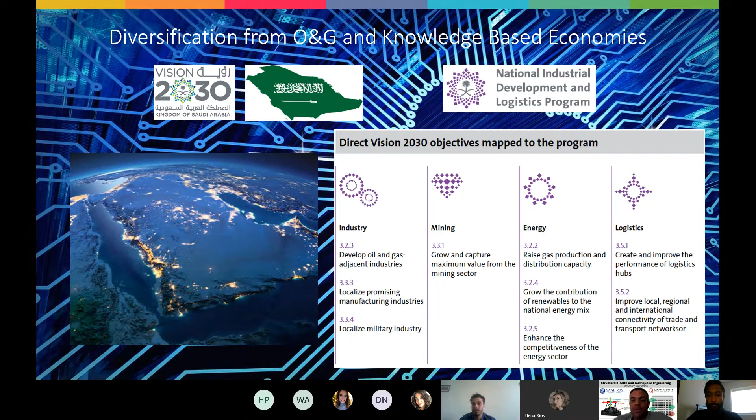This success, or the success of this initiative, doesn't and cannot occur without focusing on the biggest capital here, the human assets. The human assets support via continuous training program and technology transfer.

And finally, we at SABS RDS, we are looking forward to collaborate with you and to be part of this vision in our region's development.

Currently, Quanser has released 4 virtualized solutions: the Qube Servo 2, which is a DC servo motor; a twin rotor system called Quanser Aero; a mobile ground robot called the Qbot 2E; and a mobile manipulator called the Q-Arm. These solutions offer a complete introductory all the way to advanced offering for control systems, aerospace, robotics, and mobile robotics specifically.

That doesn't mean that we are stopping here. Quanser envisions a future where every individual will have access to our physical hardware and virtual hardware to open up the accessibility that these solutions provide.

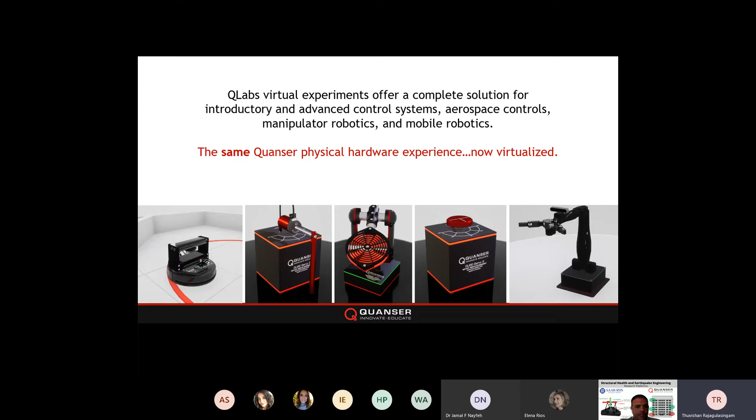So imagine every individual having a shake table or an active mass dampener on their actual PC, where they can explore the research efforts and teaching efforts in the coming future.

I'd like to quickly demonstrate what that looks like in a robotics context, but I want you to envision as if this was a fundamental vibrational structure that you know and love from Quanser. In this example, we have a pick and place mechanism that's being used to articulate the aspects of control, along with really pinpointing the accessibility and interdisciplinary approaches that you could take with an offering like this.

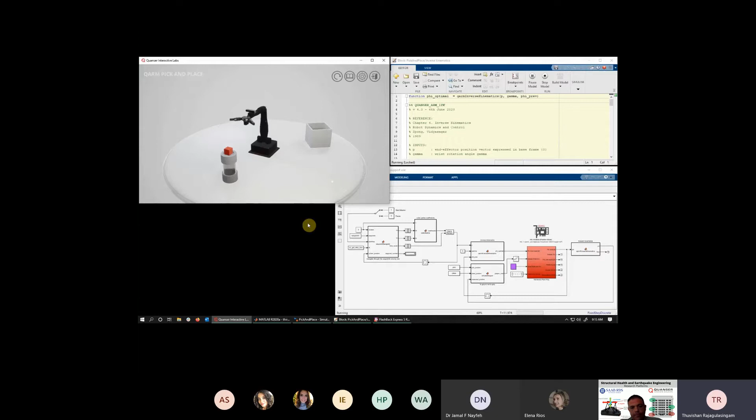Meaning you could have somebody from computer science leverage the onboard sensors, such as the RGBD sensing camera. You can have someone from robotics or mechatronics understanding concepts of actuation, dynamics, kinematics, needing to go through the math and science and the traditional academic rigors that would be required to be able to control an aspect like this.

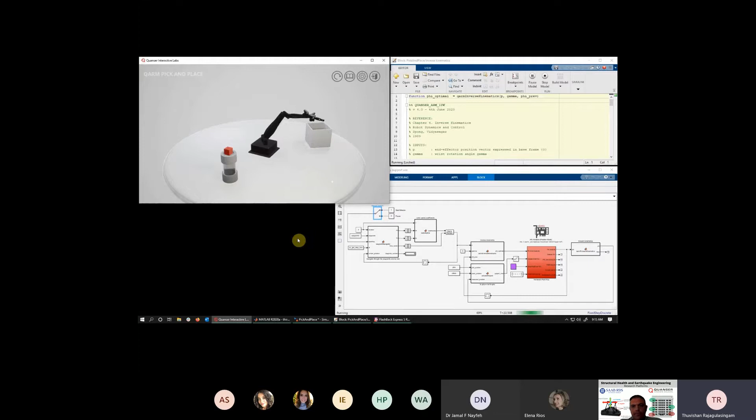But even further, you can take project-based learning approaches, or on the research front, an Industry 4.0 approach, where you're creating an assembly line that needs to read and react. So there are an abundance of possibilities, and right now Quanser's engineering team is working around the clock to have more of our virtual solutions enabled.

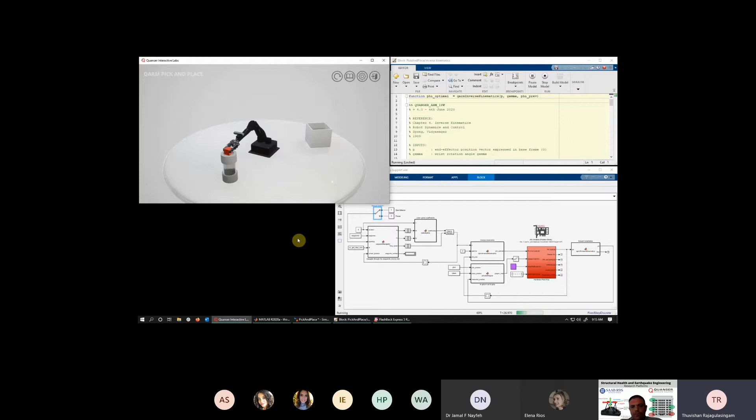We have 4 solutions that are coming down the pipeline: the rotary servo, the FlexLink, the ball and beam system, and our coupled tank solutions, for those of you who are well aware of Quanser's solutions. If you're not, feel free to take a look at our website for more insight.

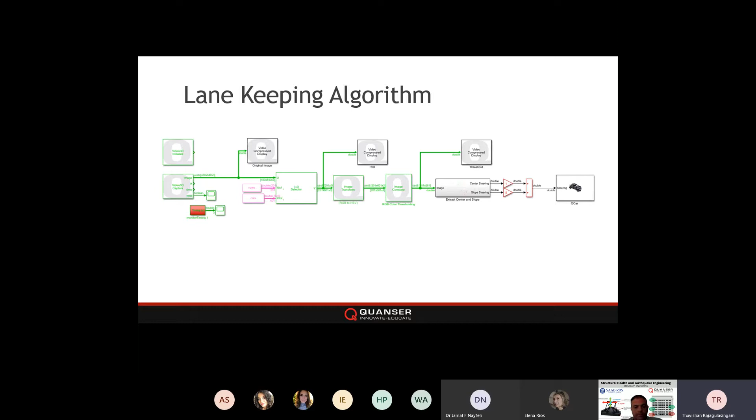With regards to how this could apply to a research application, because this question comes up a lot, we wanted to demonstrate using our own physical hardware along with the virtualized environment. Our director of engineering, in his basement during COVID, set up a custom layout with a 1/10 scale model of our Q-Car, a 1/10 scale model of a physical vehicle. He was able to develop a simple lane keeping algorithm, whose purpose is to have the car throttle at near full speed while maintaining its center position in the middle of the lane, tracking a yellow line.

You should see an example of that here, where the car is requiring itself to effectively control its position and velocity as it's making very aggressive turns in this loop format.

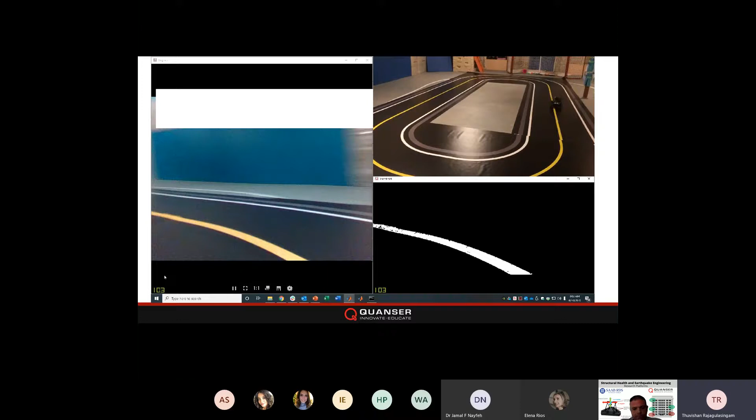Effectively, what this would require is actual procurement of the physical hardware. You need some lab instruction time, and you obviously need some technical ability to understand the theory and implement it on a physical controller for this actual device. But let's say you start running into problems or frustration when trialing your algorithms, or maybe you don't have space to set up a track at this scale.

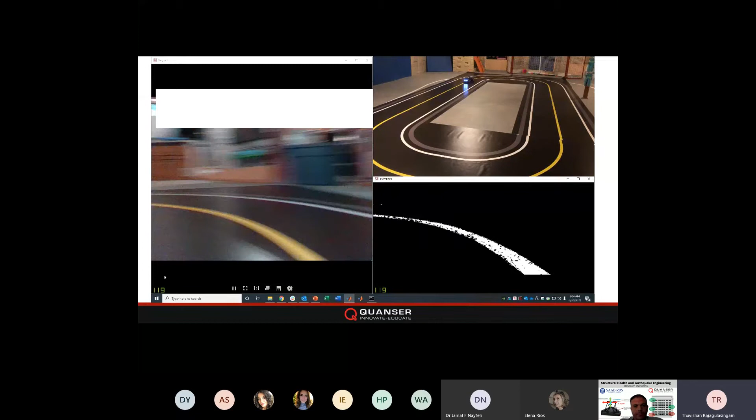What we have been able to do is provide a virtualized parallel experience where you can validate your algorithms in our virtual environment called Quanser Interactive Labs, which is a 12-month subscription for both teaching and research efforts.

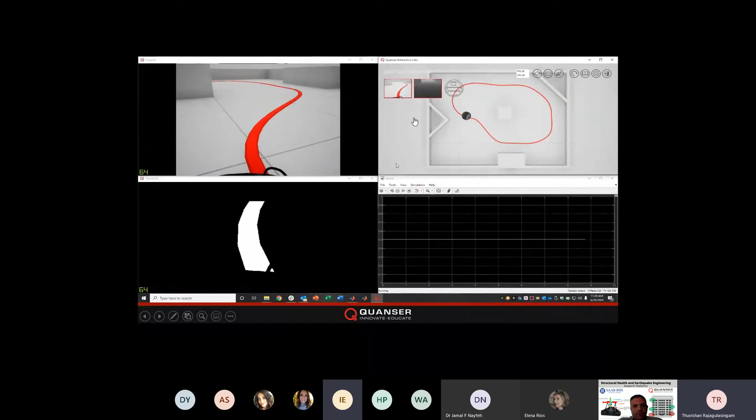Our director of engineering took this platform, Quanser Interactive Labs, and developed his lane keeping algorithm, fine-tuning it using the Qbot 2e. On the Qbot 2e, he's created his own custom layout, running the exact same controller with some fine adjustments to the actual steering algorithm. In essence, he was able to finely tune the controller utilizing MATLAB Simulink.

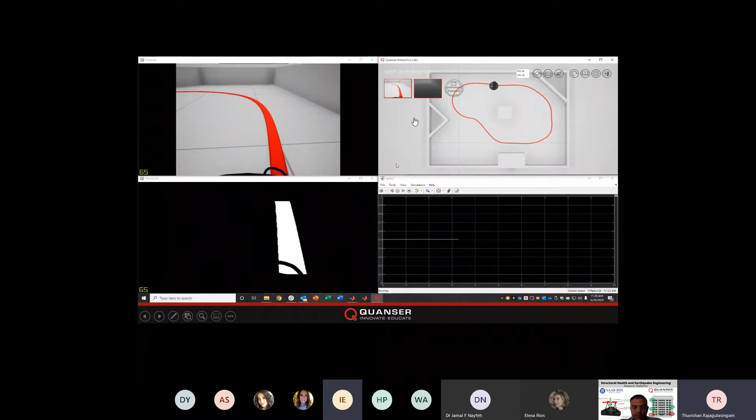Right now, at this present date, we don't have a direct tie to civil engineering or earthquake engineering, structural health monitoring, but please keep in touch with Quanser if you see an overlap of interest, or if you have specific projects you'd like to embark on, because we are in the collaborative stage right now. We'd love to hear your feedback as to what you would require and areas where you could leverage these solutions for your research or teaching efforts.

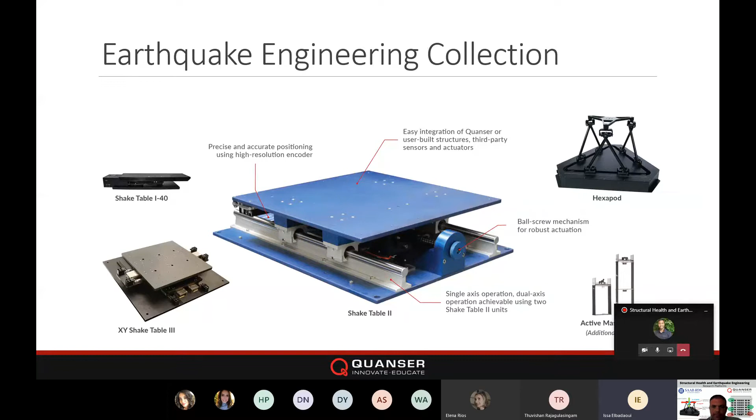This requires a different approach, such as having a designated building specifically for this sort of project, as well as having a technician or operator dedicated for this building. It does require a lot of preparation and time to test and run applications, and the setup requires regular maintenance, with expensive parts that take months to build and deliver to the professors in case there is some sort of misuse of the parts.

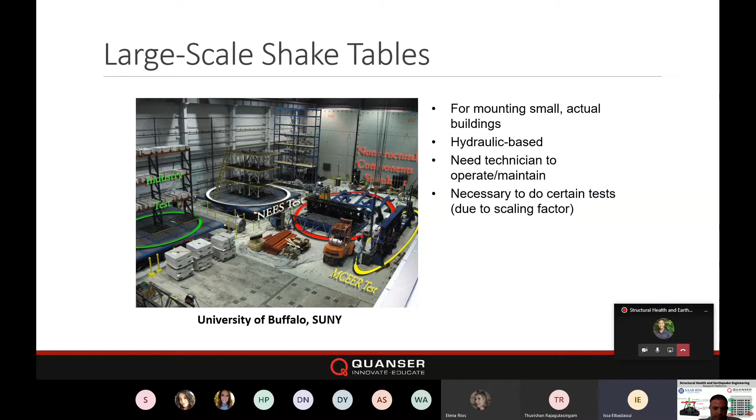So for this type of applications, as Quanser, we have developed different solutions scaled down for a regular lab that you can use at a university itself.

We have developed different types of scaled bench-size solutions for students that can be used in normal regular labs. These solutions are developed specifically for academic purposes as well as research applications. We have a variety of solutions that vary from 1 axis all the way to 3 and 6 axes, and require little to no maintenance from your end.

Some of our users have been using the shake tables for almost 13, 14 years and never actually got the chance to change any of the parts. We also took into consideration the research side of it, and we built some smart structures that go on top of the shakers to imitate earthquake vibration studies, and you have the ability of adding your own structures in case you're looking to adopt different sorts of applications.

I will start with our benchmark scaled shaker, which is the Shake Table I-40. This is a unidirectional shaker that is fed through a DC motor, as you can see from the left-hand side of the picture. It has an encoder connected to our DAQ to get the real-time data.

We also took into consideration the safety measures, so the system will come with 2 limit sensors, as you can see here from the pictures. Just in case the students are exposed to these sort of solutions, we want them to have a safe environment. And built-in accelerometers are part of the station that will get data for you to implement on your software.

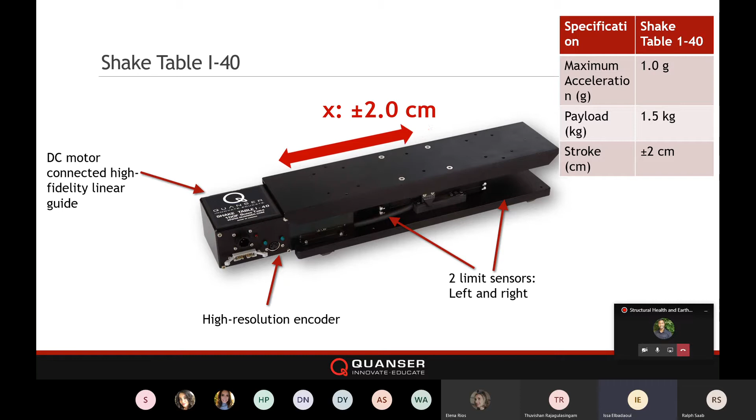In terms of specifications of this shake table, it has a maximum acceleration of 1G at a payload of 1.5, and a stroke, as you can see, of plus and minus 2 centimeters.

So in this case here, this is one of the most successful platforms in the market, the Shake Table II. Without going into many technical details of the hardware itself, the system also has a bigger platform for bigger applications in case you are trying to build bigger structures. It has an accelerometer, a DC motor, and of course it comes with safety sensors to limit the movement in case the students are exposed to some sort of the solutions.

Just to give you a little bit of background about this sort of solution. We were contacted, if I'm not mistaken, somewhere around 13 or 15 years ago by 23 universities from the US who wanted to adopt structure dynamic solutions. In collaboration with these universities, we were able to build the Shake Table II, as you can see here, and it has been adopted by different universities worldwide.

So this platform has been used mainly in education and research. Some of the specifications of the Shake Table: they have a maximum acceleration of 2.5G at a payload of 7.5 kg, sorry, 68 kilograms, and you have a stroke of plus or minus 7.5 centimeters. So it has a fair good stroke to start imitating earthquakes that you can adopt in it.

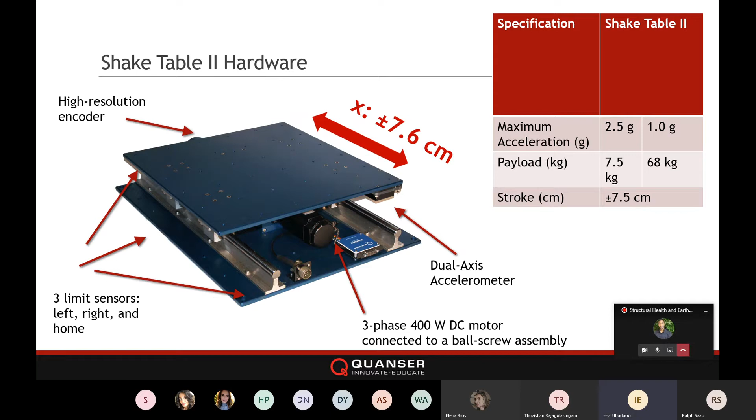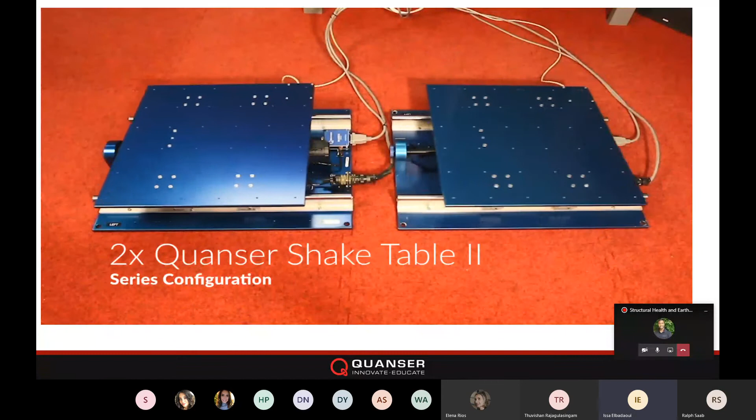I'm going to show a short video here of different sorts of movement and configurations to use the Shake Table 2. You have the ability to mount active mass dampers that we provide for vibration studies, or you can develop your own, depending on your own applications.

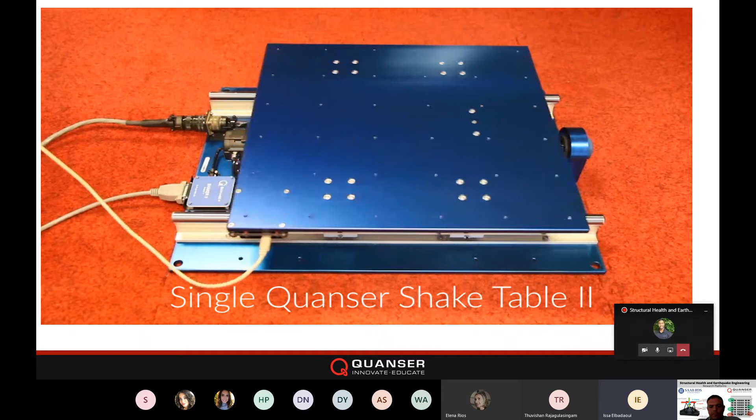The other option that we offer with dual axis is the Shake Table 3. This dual axis platform can adopt a higher payload up to 100 kg. This solution is very suitable for research applications as well as high-load teaching applications.

Some of the specifications of the hardware, as you can see: you have dual axis, you have a high-resolution encoder, four limit sensors, and a linear motor.

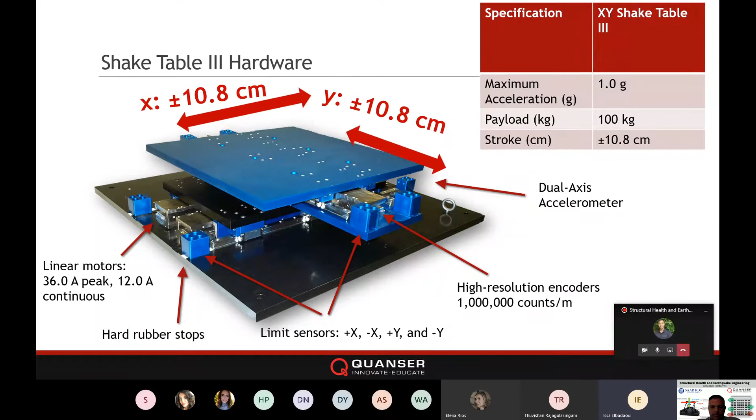Some of the specifications we can talk about is the maximum acceleration of 1G with a payload of 100 kg. We have tested it at 100 kg, but the system can adopt more payload. The stroke on each of the axes is about 10.8 centimeters.

Moving forward to a 6-axis platform that we have developed with a payload of up to 100 kg, and it can go higher. The Hexapod is a fully documented solution that Quanser has developed.

A backstory of this solution: we were contacted by a professor from New York University, Dr. Venkat, who expressed to us his concerns and what type of solution he was looking for.

We have worked hand in hand in collaboration with him to develop our Hexapod, which has been used in different sorts of applications, also in the defense sector here in Canada and in the US.

Some of the specifications I could highlight of the Hexapod itself: a maximum acceleration of 1G, payload at 15 kg, but you can up the payload to 100 kg. A stroke on the x-axis will be plus and minus 13 centimeters, y will be plus and minus 7.5, and also on the z-axis will be plus and minus 7.5.

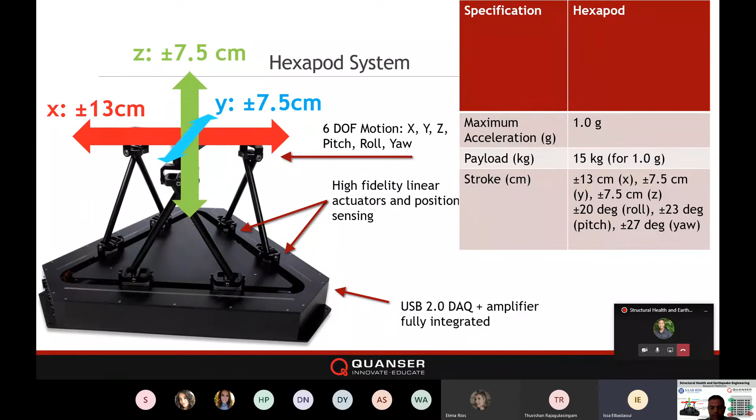I'm going to show a brief video after this that demonstrates what the Hexapod looks like, a brief demonstration, and it will also show some of the applications it has been used in.

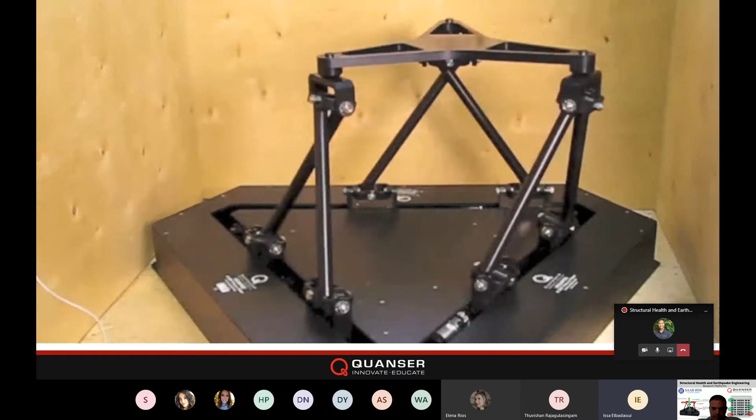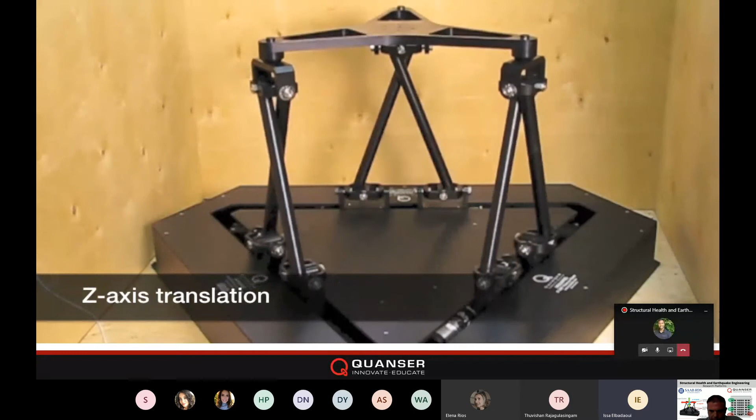Here we'll show some of the motions the Hexapod can do: the x-axis translation, then the y-axis translation, used for different types of applications or research depending on what you're looking to adopt, and the z-axis translation. As you can see, the system moves smoothly without any interruption, and it also has roll in the rotation, so it can move in X, Y, and Z.

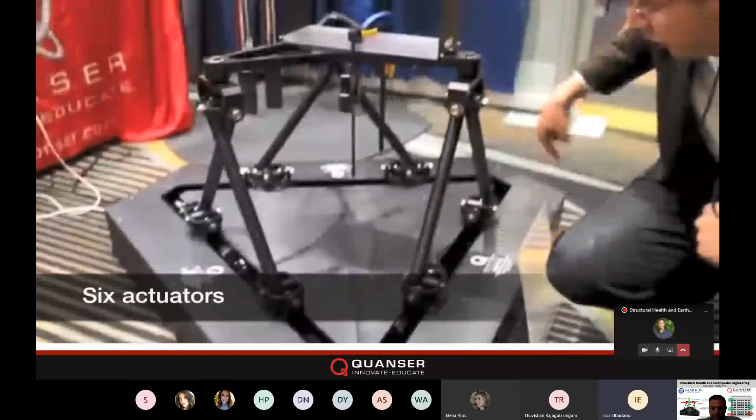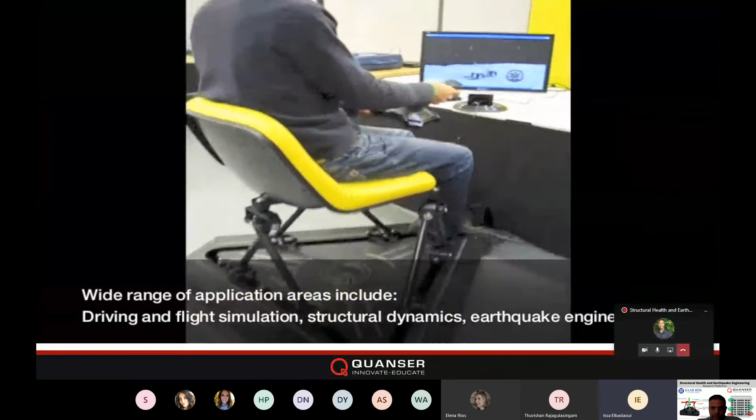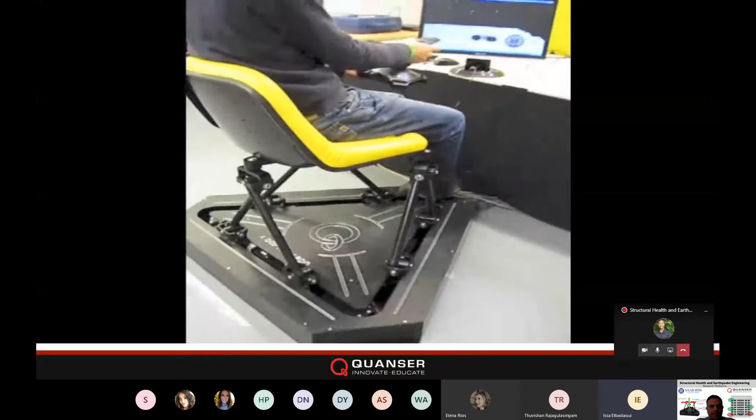Moving forward, this will show an overview of the connection of our platforms. It's very easy to set up, requires almost no maintenance, and is very robust. The system is very student-proof and can fit in a lab. Adopting these solutions, you can have 3, 4, 5, or 7 platforms in the lab depending on how many students you have, and you can also adopt them for research applications.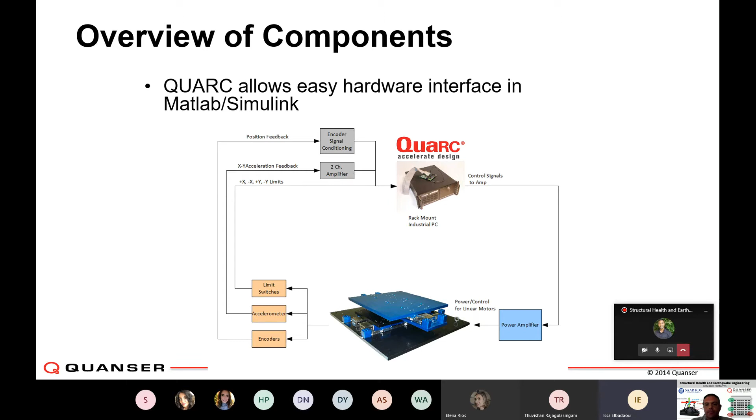Moving to the software side, we support LabVIEW, MATLAB Simulink with QUARC, our own software which allows real-time communication with the hardware, and we also give sample controllers for that.

On the left-hand side, we've developed our own software that runs basic tests such as sine wave sweep, and we provide 4 earthquake samples. You can also download earthquake data from a trusted website and upload it directly into the software to run. With these solutions, you can save the data for further analysis, share it with other researchers, or share it with students for further analysis at home for their assignments and labs.

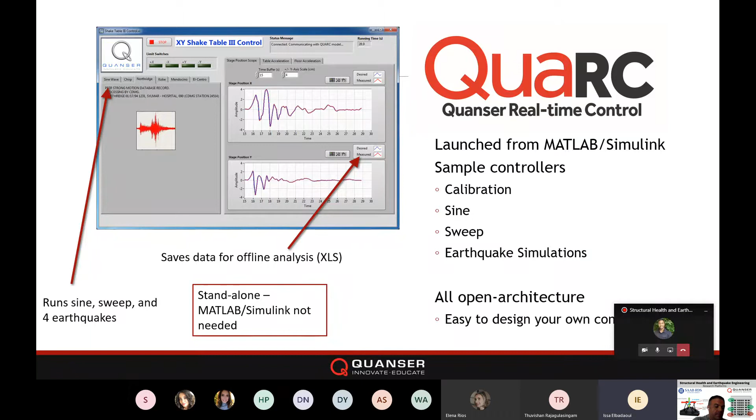All of our solutions are open architecture and come with courseware tailored for your teaching applications. The courseware has two versions: the student version, which does not have the answers or solutions, and the professor or instructor version, which has the examples and solutions to the labs and experiments we offer.

As I mentioned, you can add our mass damper to the platform, either with one floor with an active mass damper, or with two floors, one with an active mass damper and the first floor with a passive mass damper. As you can see here, these are building demonstrations, and you have the option to add your own structure if you'd like, instead of adopting our own active mass damper. I'm going to go into some details on that.

You can mount it on our shake table, connect it to our DAC, and start getting data out of it. As you can see, our systems are fairly adaptive to different applications, depending on what you want to do in your teaching or research applications.

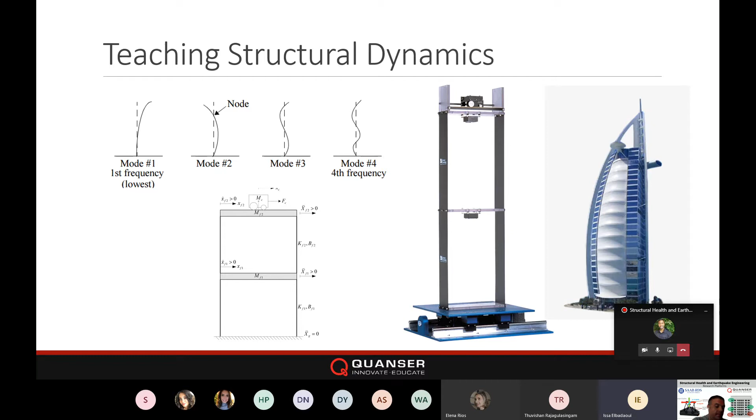Here's an example of some of the universities using our tables to motivate first-year students and bring that theory to applications.

So what we are trying to do is bridge that gap between application and theory for students who are overloaded with abstract math and physics, and give them the ability to implement their ideas and have a visual implementation of how the structure would look and how an earthquake will affect it. Moving forward, I'm going to show you an example of a class utilizing our shake table with custom structures that showcase vibration for students.

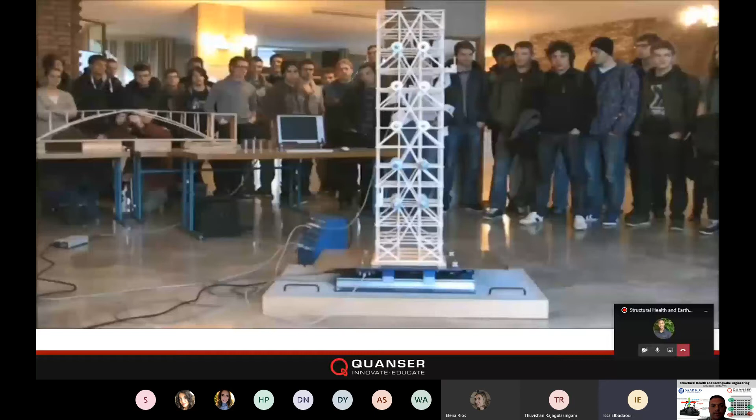I'll leave you with the video, and it will show two examples using an earthquake. The first is not damaging to the structure itself. The second one will show a damaging earthquake implemented using the shake table.

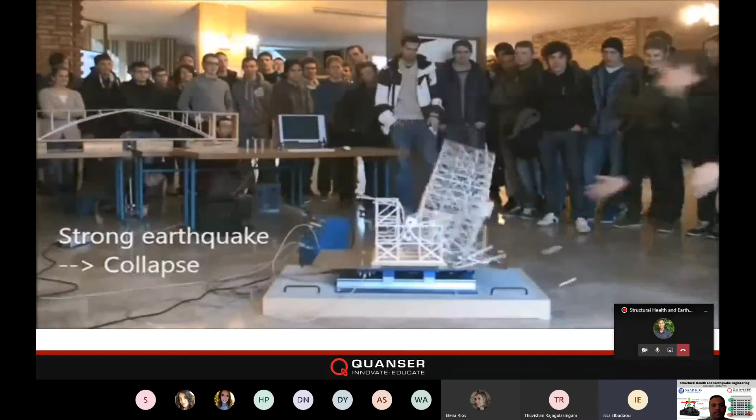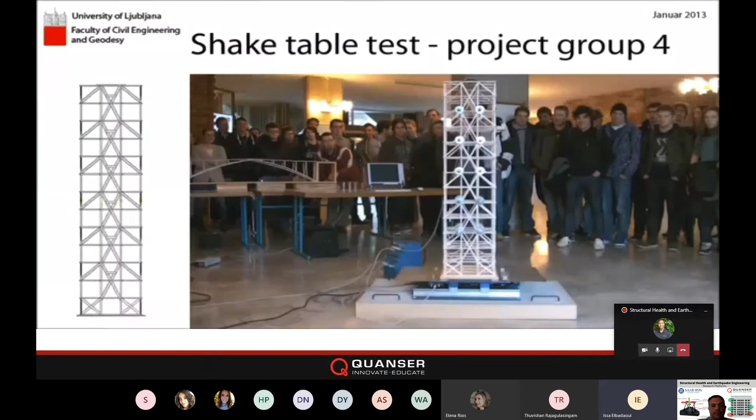Now moving to the collapse side, which is implementing an earthquake that is damaging to the structure. This gives students the ability to analyze and understand how that vibration will affect the system itself.

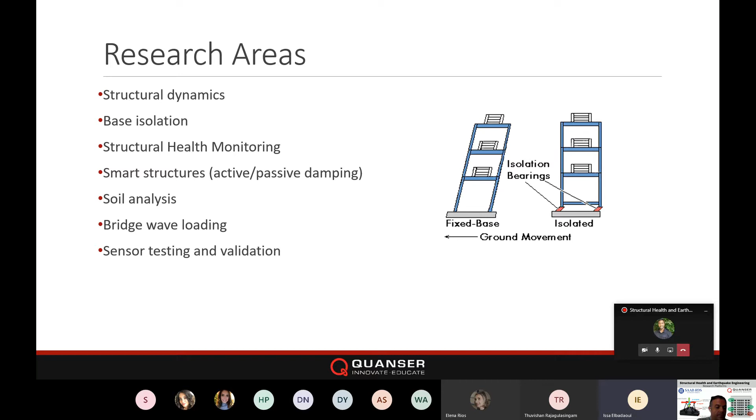Now moving forward to the research area, these are sample research areas where our platforms are ideal solutions. We have a huge list of research papers published using our shake tables, and you can use them to study structural dynamics, base isolation, smart structures, soil analysis, bridge wave loading, and other research areas already targeted with different partners from all over the world using our shake tables.

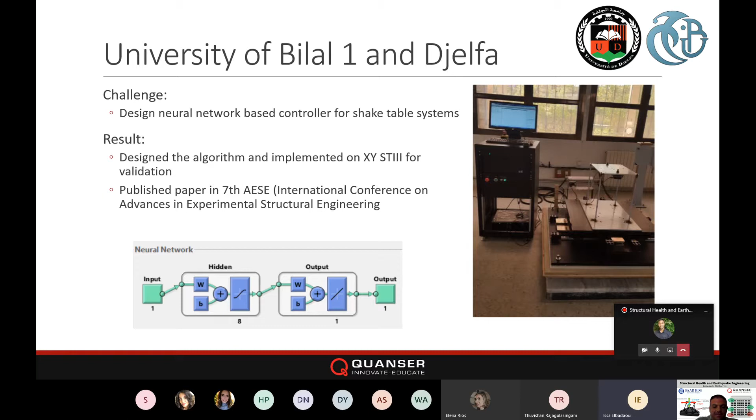So definitely using some of our platforms, you have the ability to target different research applications that are not just implemented in regular structures.

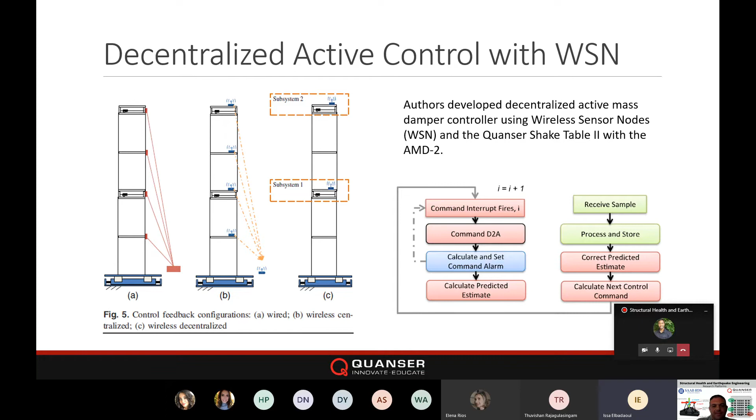Moving after that, this video will show an example configuration of a university using two Shake Table IIIs with a mounted structure itself. For their application, they used LabVIEW as the software. They can use various structures with either frictional or non-frictional surfaces.

This replicates an earthquake coming from the earth. As you can see, when it comes to bridges, one of the pillars will receive the wave before the other one, or both pillars will receive the wave at the same time. So you have the ability to do that sort of application.

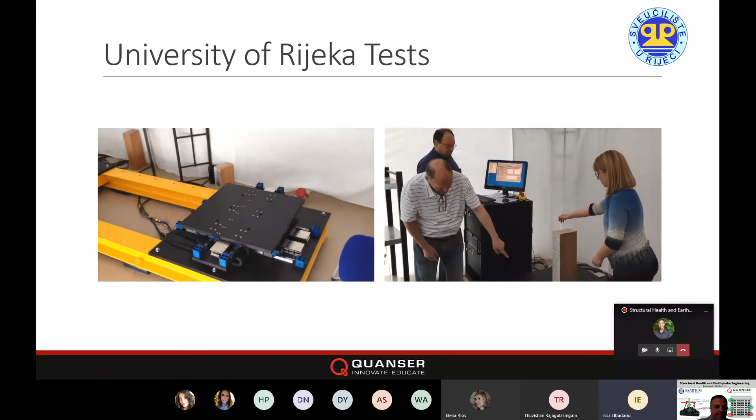With this setup, it brings a more realistic approach to real-time or real-life scenarios. With those two shake tables, you have the ability to mount structures that go up to 200 or 250 kgs, which is pretty more realistic to what happens in real life.